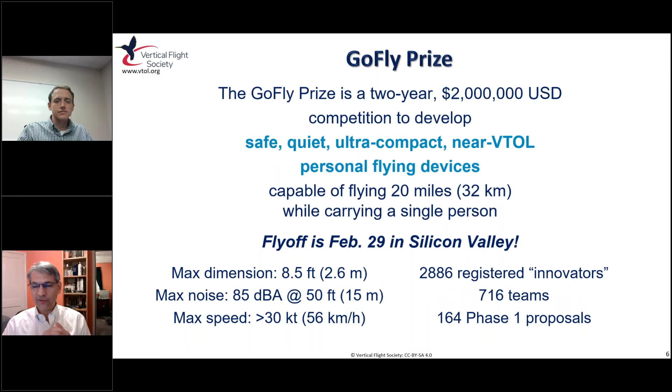They got a lot of interest. They awarded 10 awards in 2018 for $20,000 a piece.

On our website, we have, over the course of several years, 6 in-depth articles, plus a couple other articles on GoFly - you can look at our eVTOL.news site. At the fly-off itself, we have over 150 pictures of the different companies. Because of the pandemic, they weren't going to have another fly-off, and basically when somebody's ready to try and meet the challenge, then they'll go out there and do a test, or do the evaluation to see if they meet the requirements.

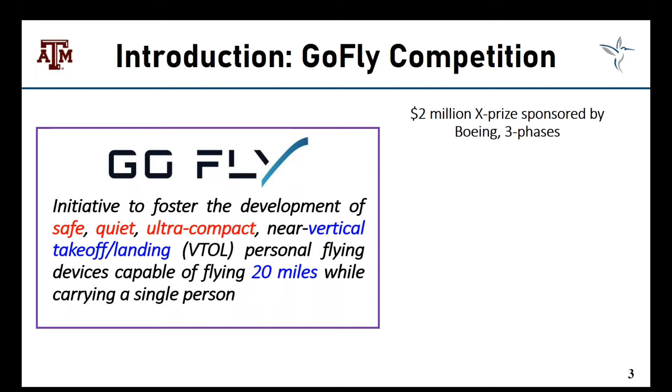The GoFly competition was an initiative to foster the development of safe, quiet, ultra-compact VTOL aircraft for carrying a single person for a range of about 20 miles, sponsored by Boeing with a $2 million X-prize. There were 3 phases. Phase 1 was a white paper design, due in April 2018; 10 winners were selected, each awarded $20,000. Phase 2 was the development and flight testing of a subscale prototype, which occurred in February 2019; 5 winners were selected, each awarded $50,000. The final phase is a fly-off demonstration of a full-scale aircraft, and it's ongoing—if any competitor meets the constraints, they'll win the $1 million prize.

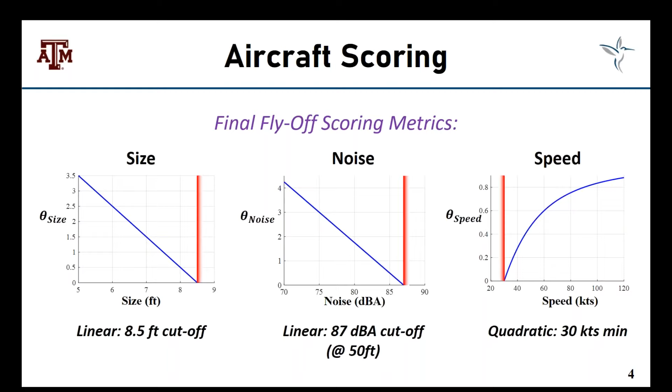So what are some of these competition constraints and scoring metrics? There were 3 basic ones: size, noise, and speed. Importantly, size and noise were weighed much more heavily than speed, so we focused a lot on those two in developing our aircraft. There were also other performance requirements, including completing 6 laps around two pylons located a half nautical mile apart, endurance requirements of 20 minutes total flight time with an additional 10 minutes reserve, and the competition emphasized an open air flight experience, requiring the operator to have an unobstructed 90-degree field of view at all times.

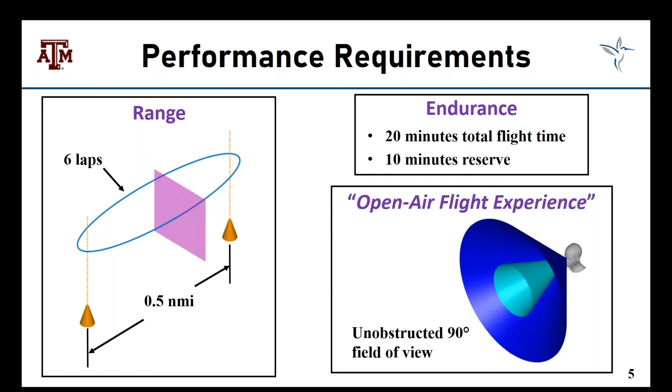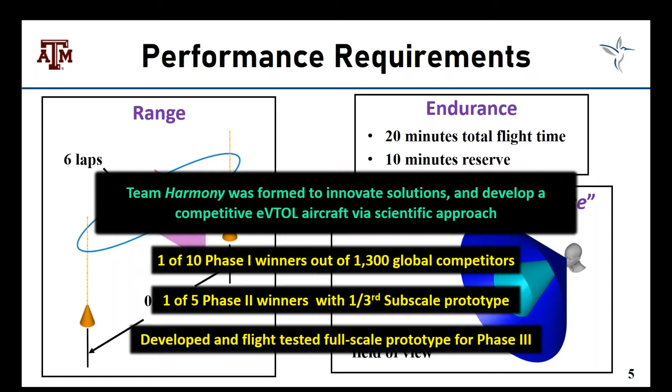Team Harmony was formed to create solutions and develop a competitive eVTOL aircraft using as rigorous and scientific an approach as possible. We were one of 10 phase 1 winners, and out of over 1,300 global competitors, one of 5 phase 2 winners for our subscale prototype. We went on to develop and flight test a full-scale prototype for phase 3. This talk will mostly discuss the design and development of these 2 aircraft.

So how did we determine our particular aircraft configuration? Well, we considered several options. We looked at more conventional configurations, such as a single main rotor or tandem rotor, intermeshing, or even a compound helicopter configuration. And these we just determined are not the most compact solution.

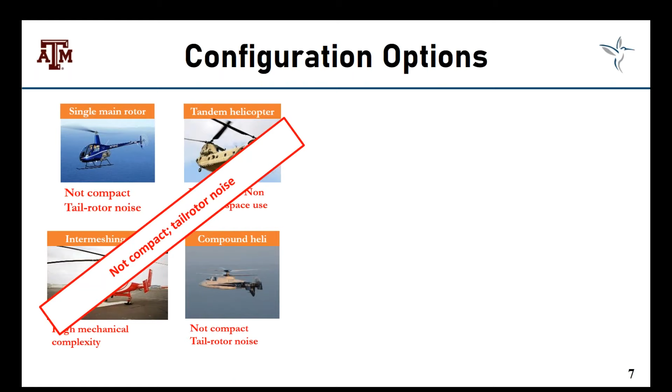A lot of them suffer from tail rotor noise as well. We also looked at ducted rotors and jetpacks.

Now, these are a lot more compact, but they suffer from excessive noise and extremely low efficiency. We also looked at reconfigurable aircraft like tilt rotors, tilt wings, and tail sitters. And for the purposes of our mission, this was just too mechanically complex and required a lot of inconvenient reorientation.

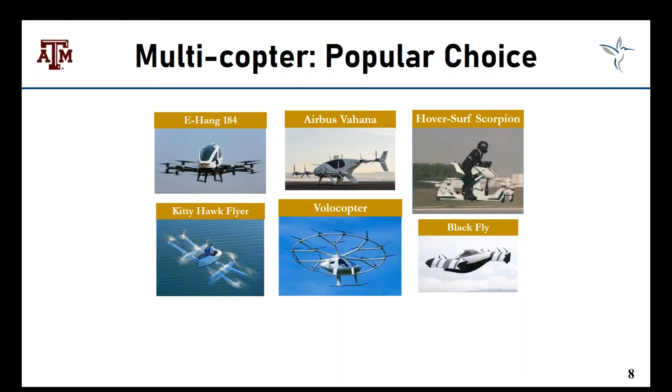Now, we also considered multicopters, which is a pretty popular choice amongst eVTOL developers today. Even multicopters are not the best choice for both maximizing aircraft efficiency as well as minimizing noise. In fact, in order to do this, there are 2 fundamental requirements: 1, you've got to minimize disk loading, and 2, you have to minimize blade tip speed.

And so after considering all of these, we determined that the optimal solution for this problem was a coaxial rotor system with an 8.5-foot diameter. This is very near the maximum size that was allowed in the competition.

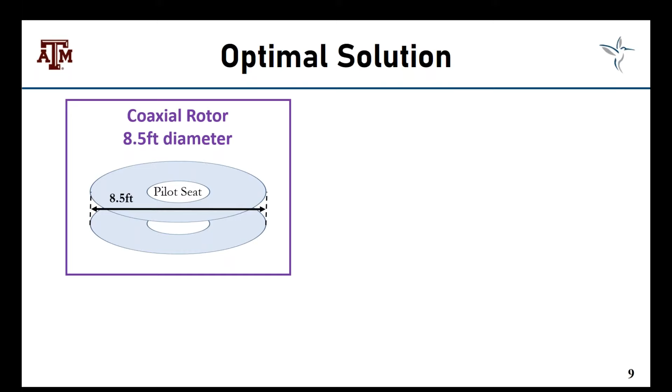So if we compare this to a quad rotor configuration, again with an 8.5-foot diameter, there's a myriad of advantages to the coaxial configuration, including over 4 times more disk area, which results in significantly lower power per unit thrust. The large rotors will operate at much higher and more efficient Reynolds numbers. And the design of the coaxial system is just a lot safer and more optimal use of space, since the pilot is at the center where the rotor speed is the lowest and you're really not generating much thrust anyway.

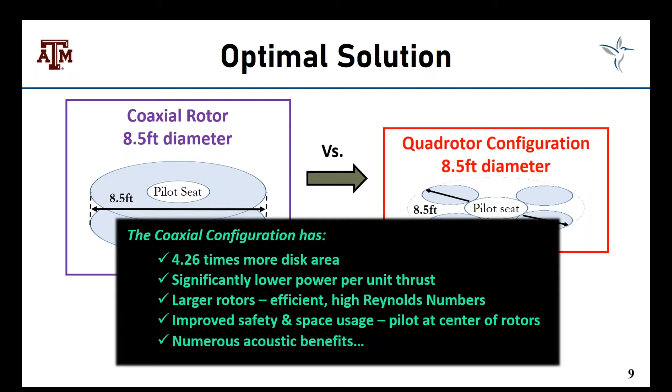And then there's also numerous acoustic benefits to the coaxial configuration. And in order to truly understand and appreciate these, we need to look at helicopter noise generation mechanisms. These come from a variety of different sources, including thickness noise, steady loading noise, high-speed impulsive noise.

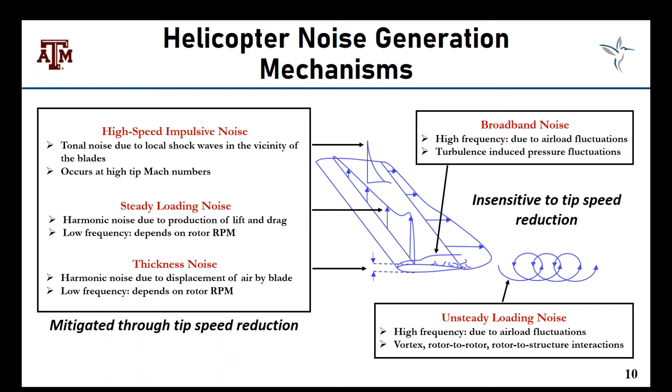The fortunate thing is that all of these can be mitigated pretty effectively through tip speed reduction. Now, you also have other noise sources such as broadband noise and unsteady loading noise. Unfortunately, these are relatively insensitive to any type of tip speed reduction efforts, and so these have to be addressed in different ways. I'll be discussing some of these throughout the talk.

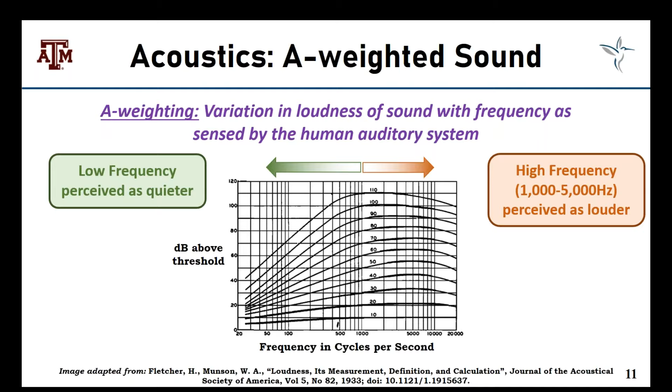You can see that for a reference tone, the lower frequencies are generally perceived as quieter, while those in the higher range, particularly in the 1 to 5 kilohertz range, are really perceived as much louder than they are. And so this is one reason why things like a quad rotor or maybe a chainsaw are particularly loud and irritating, because your ear is naturally amplifying the frequency in that particular range.

So from an acoustic standpoint, if we compare the coaxial configuration versus a quad rotor, there's a couple things to keep in mind. First, the magnitude is going to be a strong function of blade tip speed, and then the frequency of the sound, which is basically the blade passage frequency, is going to be a function of two things: your RPM and the number of blades.

So if we put these in a chart side by side, in the case of the coaxial system, we've got a large rotor operating at low tip speed, so we get a pretty low noise magnitude. But then in the case of the quad rotor, we have the opposite: small rotors, high tip speed, and the penalty is a high noise magnitude.

If you look also at the low RPM of the coaxial configuration, this is going to result in a much lower frequency, and as a result, an A-weighted advantage. The opposite, again, is true with the quad rotor: you're going to suffer from high frequency and an A-weighted disadvantage.

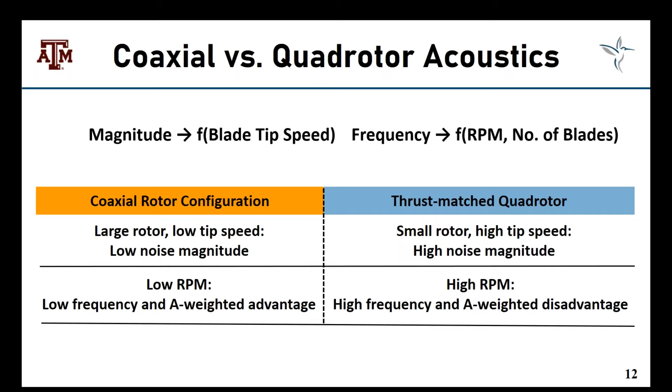Now, another consideration in a coaxial configuration is rotor spacing. And so we did some experiments where we measured the sound pressure levels for a variety of spacings between the coaxial system.

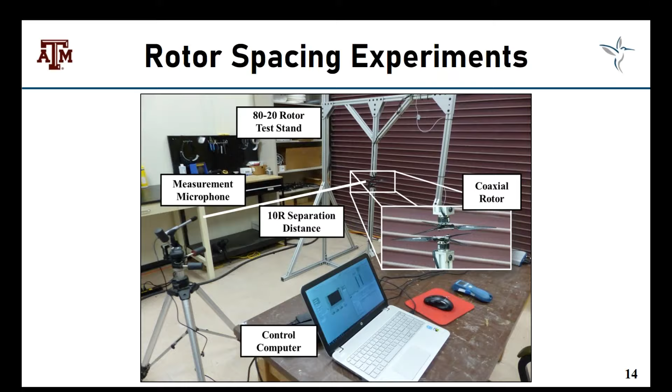So that was the distance we selected for our vehicle. Our final configuration consisted of a coaxial rotor system with a rotor diameter of 8.5 feet. That separation distance was 25% of the rotor radius, and we positioned the pilot above the rotor system to have a clear field of view, staying consistent with the spirit of the competition.

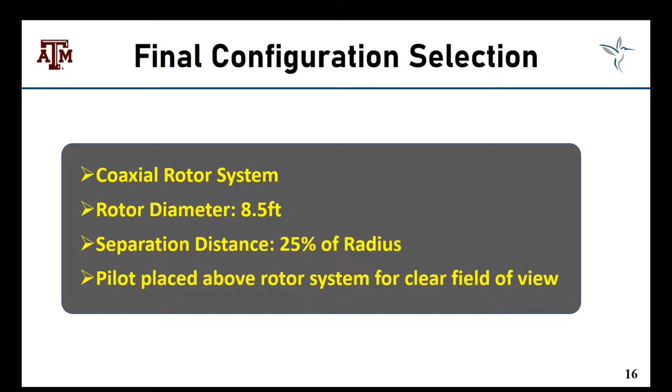As I mentioned, there have been some historical coaxial PAVs developed in the past. Some well-known examples are the Aerocycle and the Hiller platform. These were developed for military purposes, and they rely on kinesthetic control, where the pilot shifts their weight in order to control the CG location of the vehicle.

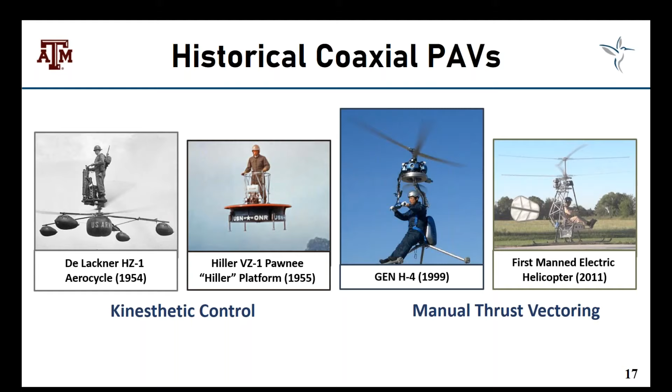More recently, we've got the Gen H4 and the first manned electric helicopter. These have the rotor system on a gimbal, and the pilot uses manual thrust vectoring to control the system. In all of these cases, we get a really heavy dependence on pilot skill, which prevents you from utilizing any type of stability augmentation system that would enhance the flight. As a result, none of these are really the best choice for a personal air vehicle flown by the average individual.

So we developed our own coaxial helicopter. Let's talk about the design and development of that system, starting first with the rotor system itself.

We had several key design tools, starting with an in-house blade element momentum theory code, which captured a lot of the complex aerodynamic interactions between the two rotors in the coaxial system. We also utilized Helios, a computational fluid dynamics code, which captured the flow field and air loads on the blades. Then we had an in-house acoustic solver that modeled all of the helicopter noise generation mechanisms.

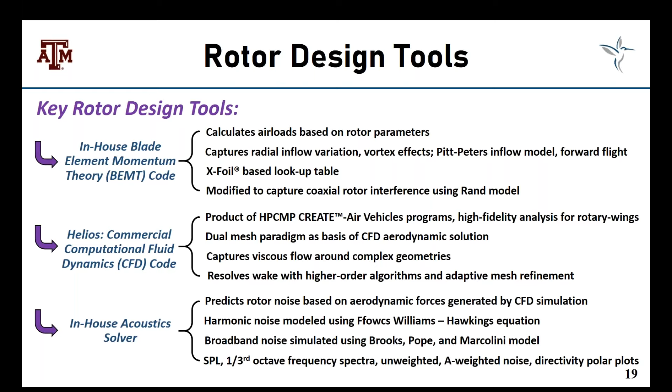We used these tools to do a pretty detailed parametric study with two basic objectives: minimize forward flight power, and minimize noise in hover. I'll go through the different parameters we varied, starting first with the rotor RPM.

In this plot of power versus forward speed, we can see pretty clearly that lower RPM decreases the required power. But looking at max angle of attack versus forward speed, lower RPM actually increases the required angle of attack, decreasing stall margin. After balancing these two, we determined the best RPM was 950, because this gave us reduced power requirement while allowing at least a 30% stall margin.

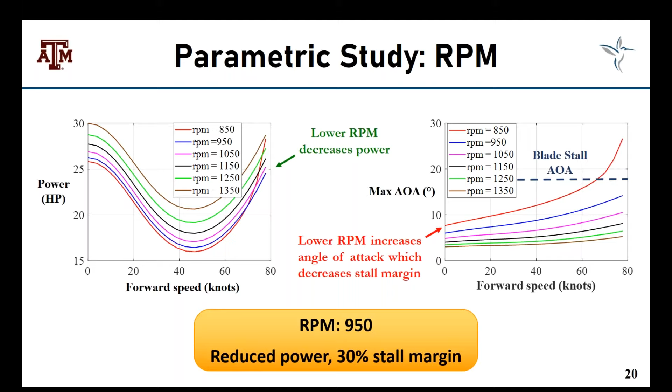We also did a similar investigation for solidity. Lower solidity results in lower power requirement, but again, lower solidity results in higher angle of attack and decreased stall margin. So we selected a solidity of 0.2 for this rotor design.

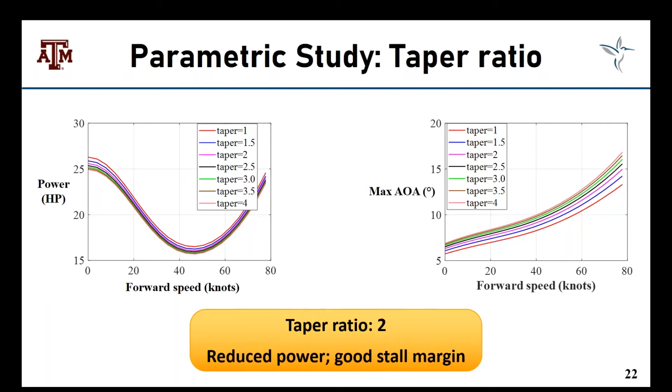Similarly, we did the same for taper ratio, and determined a taper ratio of 2 was best for this configuration. For twist, we determined the optimal twist was -9 degrees.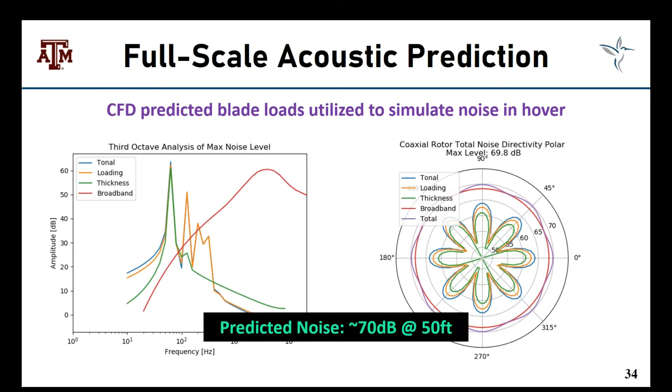There's a lot of interesting stuff going on here, a lot we could talk about, but the take home is that our predicted noise was about 70 dB at 50 feet. We'll see later on how this compares with the actual flying aircraft.

So we wanted to somehow verify these acoustic predictions. We took our subscale rotor sound pressure level measurements and scaled them up to the full scale size. You can see here in this plot of sound pressure level versus frequency our analysis, our predictions, and then our scaled experiments, and we got pretty similar results. So we were pretty confident that our full scale predictions would be accurate as well.

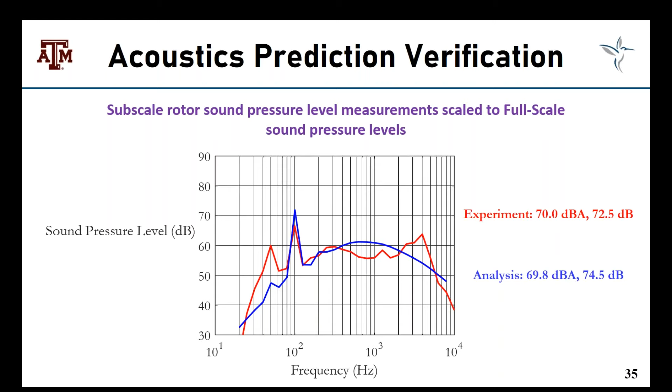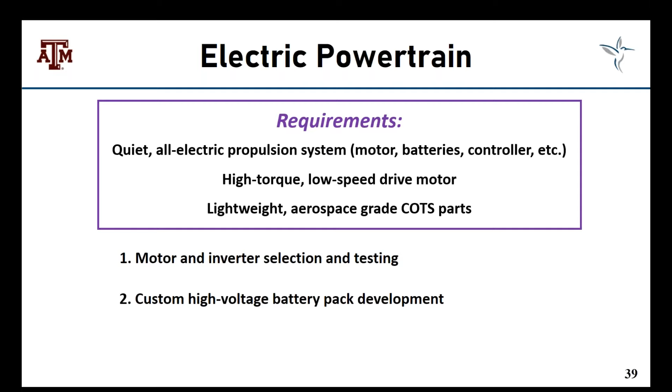All right, so let's talk about the electric powertrain now. We had a few key requirements: a quiet all-electric propulsion system, a high torque, low-speed drive motor, and we tried to use lightweight aerospace-grade COTS parts where possible. I'll discuss the selection and testing of the motor and inverter, the development of the high-voltage battery pack, and then the development of a quiet one-stage transmission.

When it came to selecting the motor, there were a few architecture options available. One was a radial flux stator, where the magnetic lines of flux are perpendicular to the axis of rotation. On the other hand, you get an axial flux stator, in which the magnetic lines of flux are parallel to the axis of rotation. We did a trade study of available radial and axial flux motors, and we determined that we get more torque per unit mass with the axial flux stator.

So we selected the EMRAX 208 axial flux permanent magnet motor, with a mass of about 20 pounds and max continuous power of 55 horsepower. We selected the high voltage model for efficiency, and this motor was an air-cooled model.

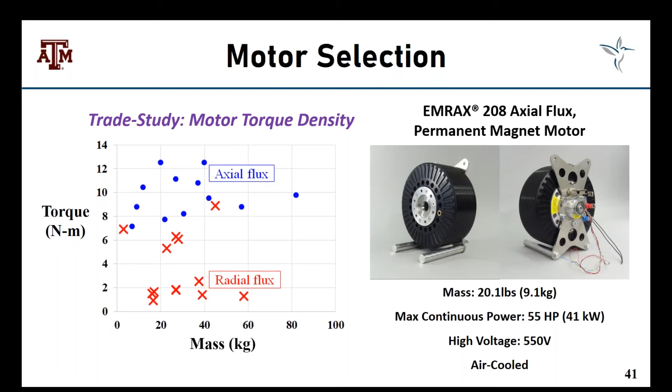Here you can see in this plot of our test data, torque versus RPM, with the efficiency curves provided by the manufacturer. This here is our case for axial climb, for hover, and also for forward flight. You can see that in all these cases, our motor efficiency was predicted to be over 94% for all these flight conditions. So that was the good part.

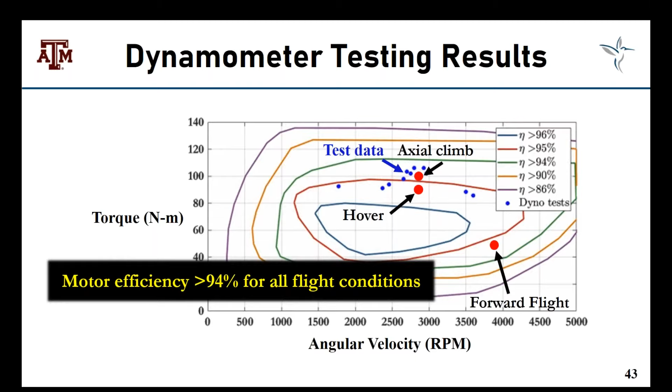The unfortunate thing, though, was that we experienced a lot of motor overheating during this testing, partly due to lack of sufficient cooling and lack of airflow over the motor. So what we did was we graduated to the next size EMRAX motor, the 228. It was slightly heavier at 27 pounds, with a max continuous power of 83 horsepower. Again we selected the high voltage version, and the key was that this was both an air and water cooled unit. These were the motors we finally installed on the aircraft, one per rotor, and we also developed custom cooling systems for each of the motors and inverters that kept it cool with a water cooled system.

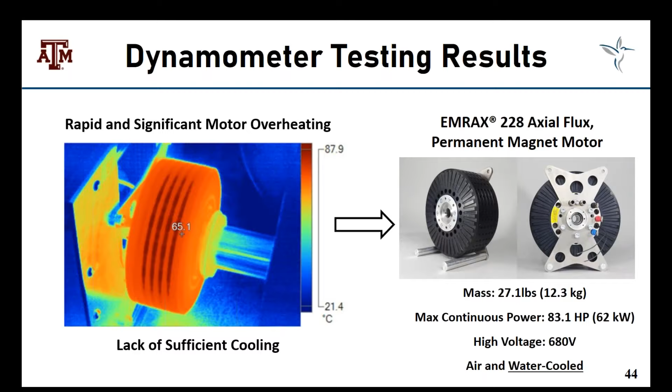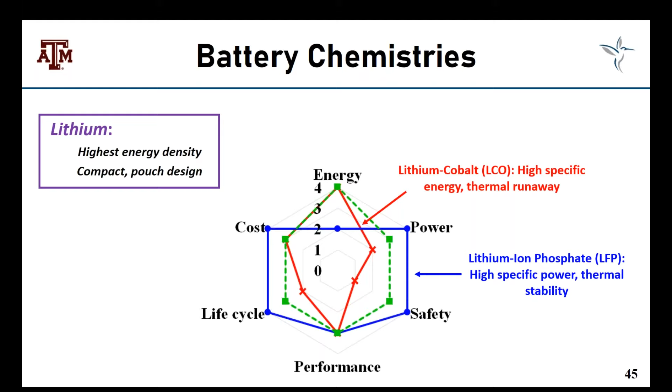As far as the battery chemistries, we considered a variety. We selected lithium because this gave us the highest energy density and comes in a compact pouch-based design. In this spider graph of various performance metrics of batteries, we have a few different varieties shown here. In red is the lithium cobalt, which has a high specific energy but tends to overheat. There's also lithium ion phosphate, which has a high specific power and more thermal stability. And then there are other more exotic ones like lithium manganese nickel cobalt, which is becoming used more in eVTOL applications.

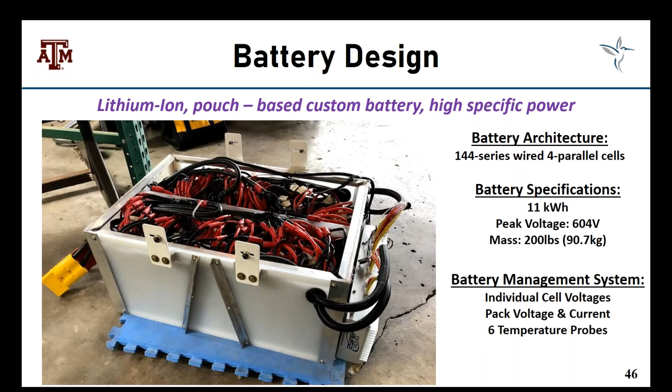We finally selected a lithium ion pouch-based custom battery, which provided us with a high specific power. Here you can see in this photograph of the assembled battery pack: it was 144 series wired, 4 parallel cells, providing 11 kilowatt hours of battery. The peak voltage was 604 volts and it had a mass of 200 pounds. There's a battery management system strapped to the back of this, which monitored all the individual cell voltages, the pack voltage and current, as well as 6 temperature probes dispersed throughout the pack. Our pack level energy density was about 133 watt hours per kilogram.

As I mentioned, we had a one-stage reduction drive to meet the low RPM, high torque demands of our rotor, and we considered a few different drive styles, for example, belt and pulley. These have been demonstrated in a V-belt transmission in the YO-3A Quiet Star, a virtually silent aircraft developed during the Vietnam era.

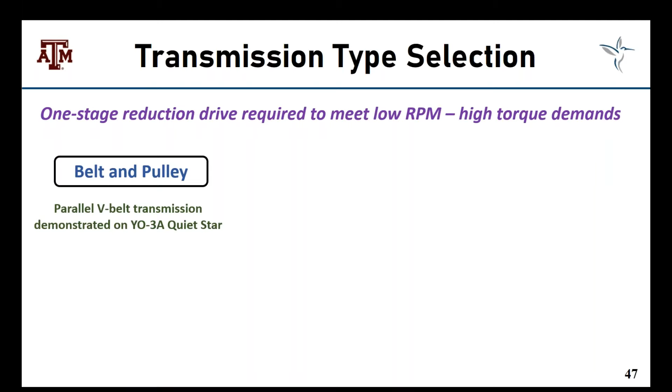This, however, is not a particularly compact solution. Belts can suffer from runout noise. It requires a lot of heavy support structure. And meshing noise can also be an issue with timing belts.

So we also looked at chains and sprockets. This is a little more compact. You can mitigate the noise with a tensioner, but it tends to be maintenance intensive, mechanically complex, and also requires a heavy support structure.

So we looked then at the gearbox option. This is a more simple, elegant, compact, and reliable solution. It can, however, be relatively noisy. There are some steps you can take to mitigate this noise: using helical teeth with a high contact ratio tooth profile, enclosing the gearbox in a properly designed transmission housing, and providing sufficient lubrication. This was ultimately the option we went with.

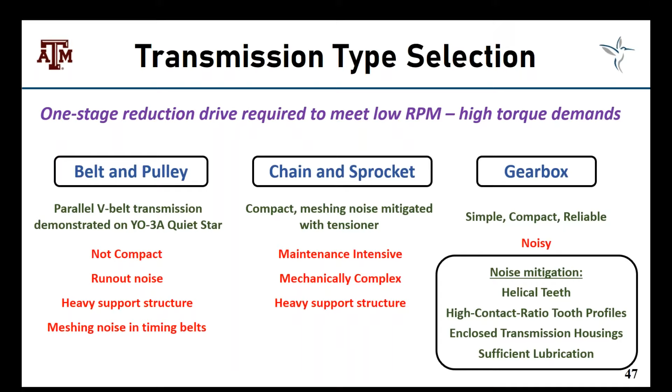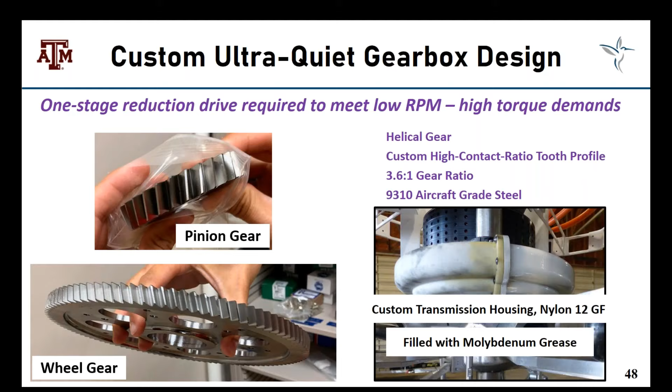Here's some photographs showing the pinion and wheel gear. These are a helical gear pair utilizing a custom high contact ratio tooth profile, providing a 3.6 to 1 gear ratio, and manufactured of 9310 aircraft grade steel. Here you can see a photograph with the transmission housing around it, made of nylon 12 GF and filled with molybdenum grease. We're pretty happy to report that this custom designed transmission was quieter than even the rotor during operation, so we were pretty happy about that.

All right, so let's talk about the flight dynamics and control of the system. In our system, we have dual rigid rotors. They are controlled with mechanically independent, electronically coupled swash plates, which gives us excellent control authority, maneuverability, and gust tolerance.

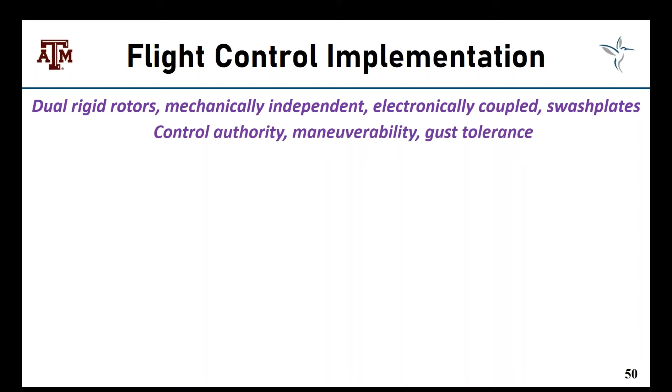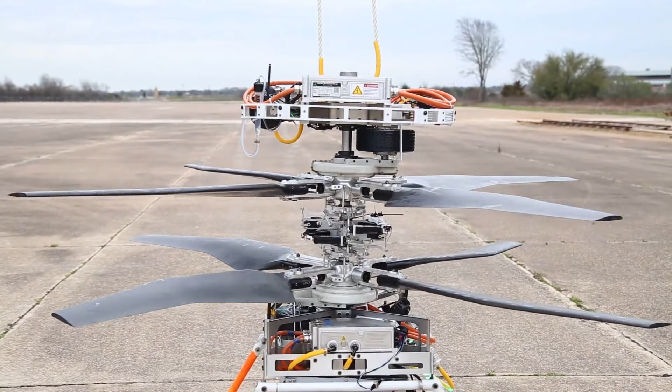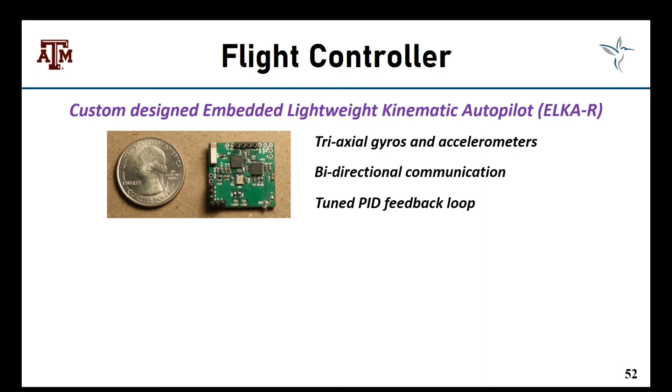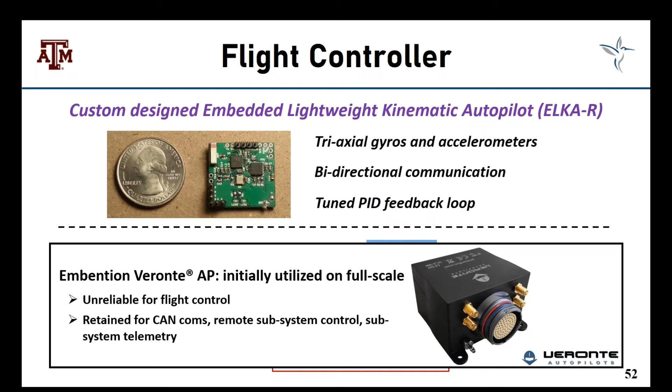I will say that initially we did use the Embention Veronte autopilot on the full scale, but it proved unreliable for flight control, though we did retain it for CAN communication and other subsystem control.

We modeled the flight dynamics of the system to predict the flight characteristics and evaluate its stability, so we derived the fully nonlinear equations of motion. We got the inertias and mass from our CAD model. For the forces and moments, we used our BEMT model with a Peters inflow, and all of this was analyzed using Texas A&M University rotorcraft analysis code.

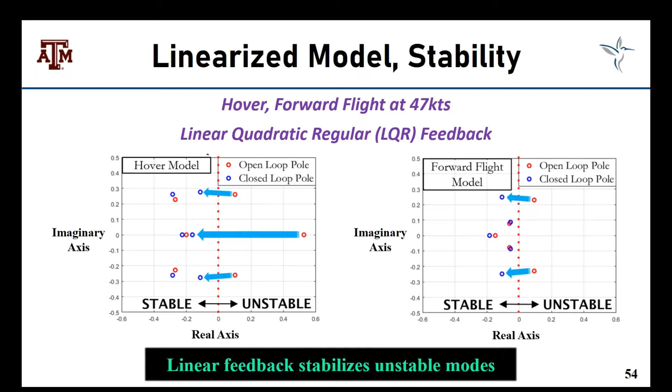We took our nonlinear system and linearized it about hover and forward flight at 47 knots and stabilized it using a linear quadratic regulator. Here you can see the open loop and closed loop poles for the hovering case, and you can see that it stabilizes all the unstable modes, similarly for the forward flight model. This demonstrated that our linear feedback was in fact able to stabilize the unstable modes.

We also did some flight simulations. The first thing was we perturbed it with a 15-knot upwind gust, and you can see that the disturbance was regulated within about 15 seconds or so. We also simulated the entire competition course, which involved vertical flight, forward flight, maneuvering flight, and all that stuff. All of this demonstrated, or at least predicted, that our aircraft could handle gusts well and also perform well in tracking.

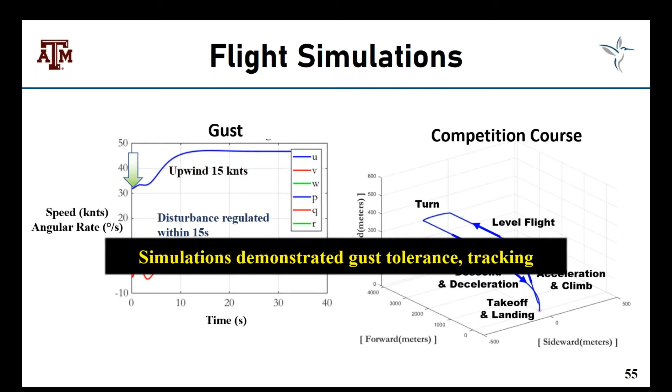Now we also did an X-plane simulation of the aircraft. Let me see if I can play this.

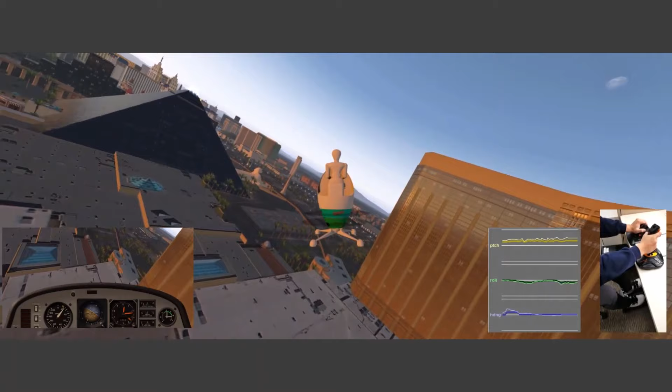All right, so this is a real-time simulation of our aircraft in X-Plane. This was flown by an experienced helicopter pilot, and he reported that the aircraft behaved well. There were no unexpected dynamics or anything like that, so we were pretty happy with this result.

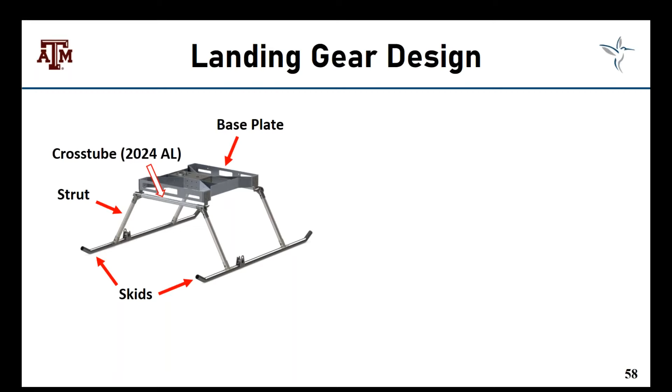Okay, so let's talk about the structural design and analysis of some of the parts in the aircraft, starting with the landing gear. Here you can see it has skids and vertical struts that convey the forces from the skids to the base plate. One critical component is the cross tube, which acts as a leaf spring or shock absorber to absorb the landing impacts.

For the 1G case, here you can see the von Mises stress. Here's the case for the 4G loading case. Even under the 4G loading, you can see that the von Mises stress was below the maximum yield stress, so we were pretty happy with that.

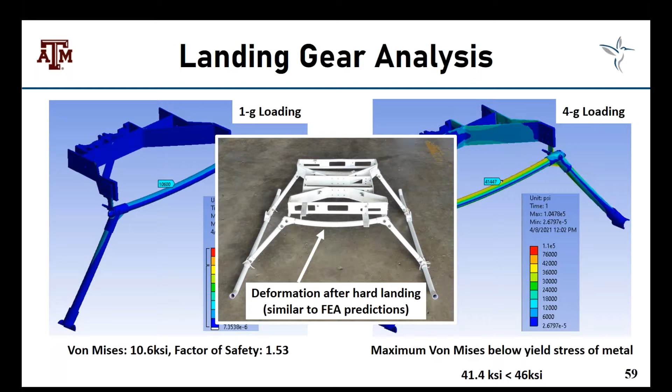Interestingly, we did have a pretty hard landing, and here you can see some plastic deformation of that cross tube, which demonstrated its action of absorbing those landing impacts.

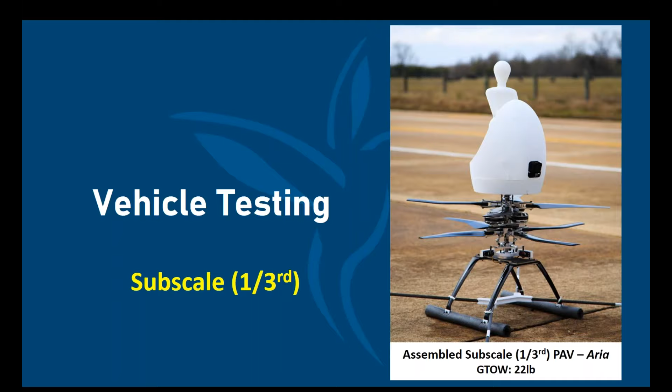All right, so let's talk about vehicle testing. We'll talk first about the 1/3 scale aircraft. Here you can see in this photograph on the right the assembled aircraft, which had a gross takeoff weight of 22 pounds. The first step of the testing was gimbal stand testing.

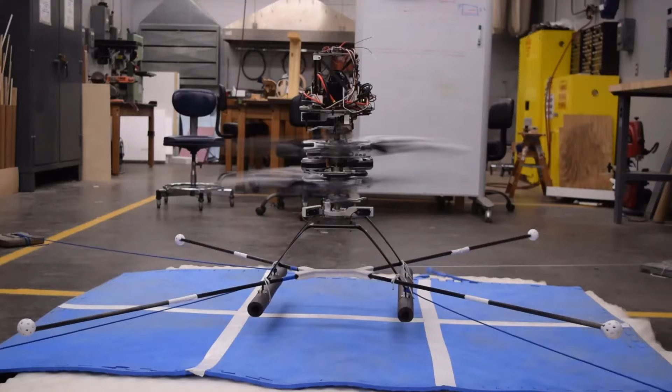Okay, so the next phase of testing was indoor tether testing for the subscale. This was to tune the flight controller and trim the rotors and stuff, and it performed well and demonstrated stable flight. So that was a good result from that.

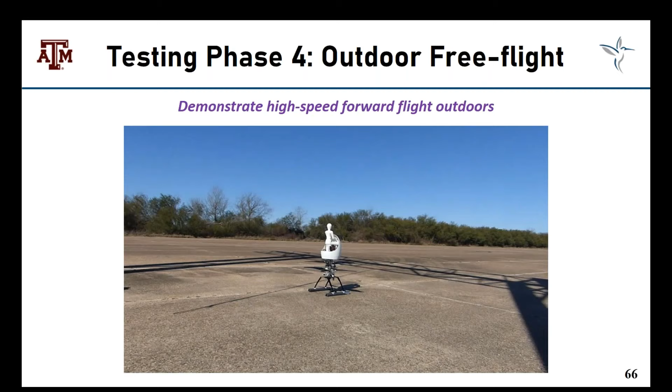So the fourth phase of testing was outdoor free flight testing. This was to basically demonstrate forward flight capability, maneuverability and controllability in high-speed forward flight.

We were pretty happy with the performance of the aircraft. That rigid rotor system really turned out to have a lot of control authority, and of course in the hands of an experienced RC pilot that helped a lot.

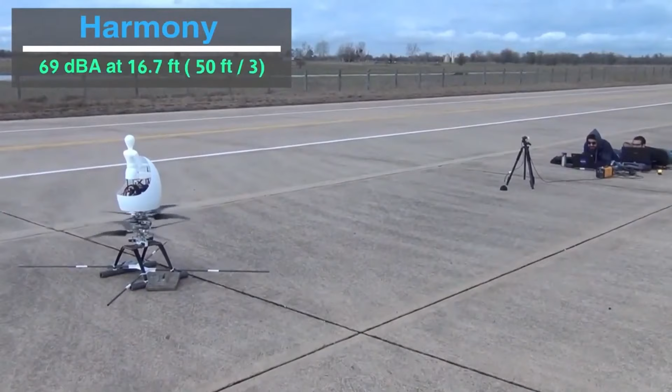Okay, and then we also did some sound pressure level measurements of our system in comparison with a thrust-matched quad rotor. Let me show that here in this video, where we'll just listen in and hear the difference between the quad rotor in comparison to our system. And so here you can clearly tell that there's a marked difference between the two.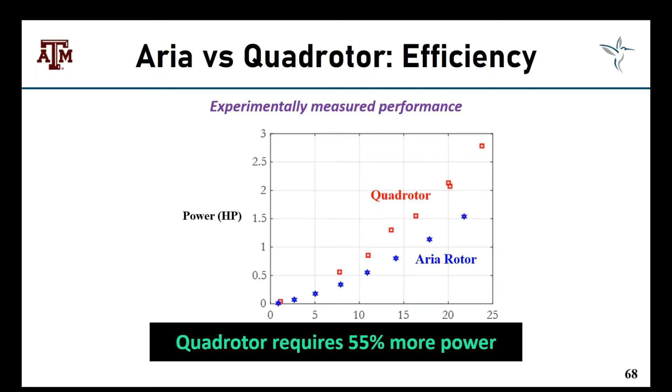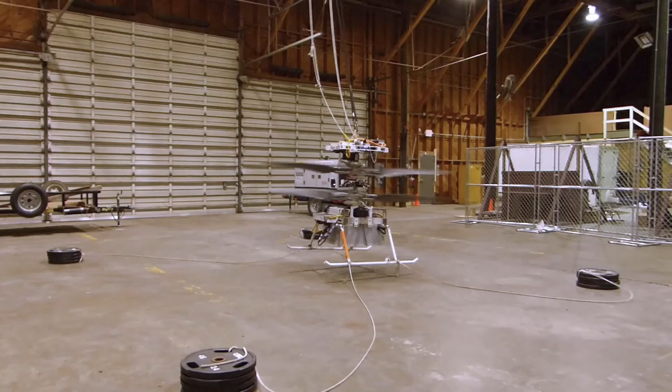And so here we are doing some indoor tether testing with the full-scale aircraft. The pilot is providing some different inputs, and it responded favorably. I'll note here the tethers are just for safety. They're not actually affecting the dynamics of the vehicle at all.

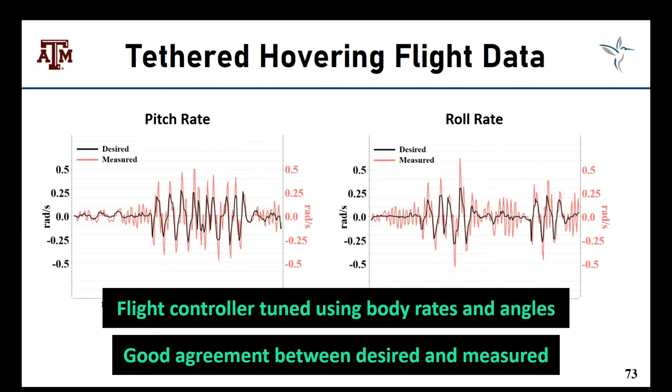From that, we collected some of the flight test data. This is the pitch and roll desired and measured rates. The reason why these are important is because our flight controller was tuned by using these rates and angles. We got pretty good agreement between the two of them, demonstrating that our flight controller is pretty well tuned. There is a little bit more noise in the measured result, which is kind of expected for the rotary system.

Now, during indoor tether testing, we also did a payload test. We've loaded it up with 165 pounds of payload, and the aircraft lifted it very well. There were no issues, no unexpected dynamics, nothing really changed with the system.

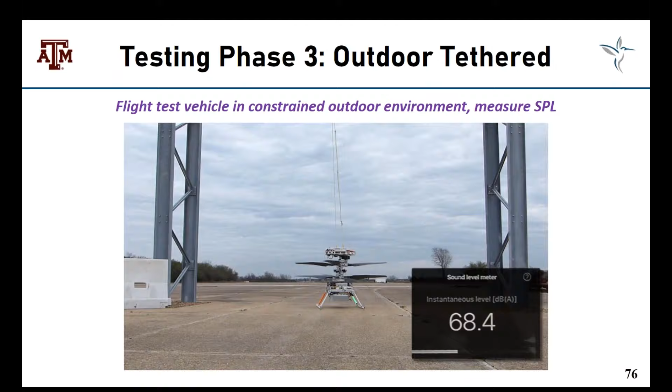All right, and so the next phase of the testing was outdoor tether testing, and this basically allowed us to have an intermediate stage between indoor tethered and free flight outdoor. Another thing we did also was we measured the sound pressure level at 50 feet during this test. So let's play this here.

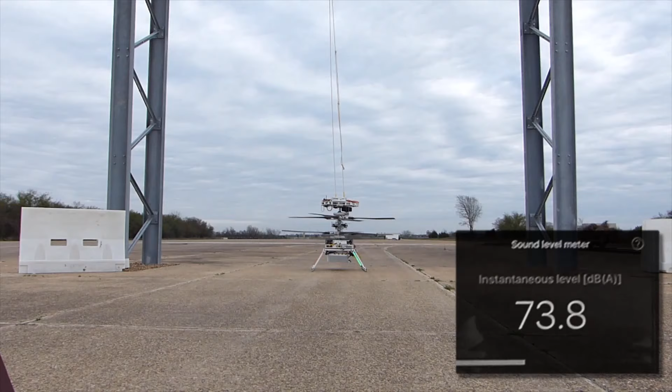So here we can see hovering at 50 feet, we're getting about 73 dBA or so, which is pretty remarkable for this size aircraft. In fact, as far as we know, this is the quietest aircraft in this weight category, the quietest rotorcraft in this weight category that we know of.

All right, and then the final phase of testing was outdoor free flight testing. And this, of course, was to demonstrate the forward flight capabilities of the system.

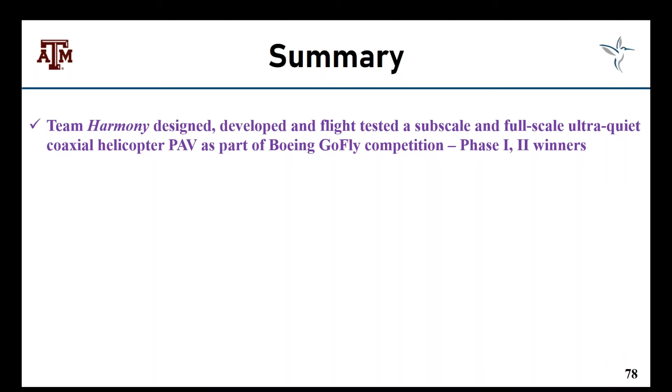Okay, so with that, we'll summarize briefly. Team Harmony, we designed, developed, and flight tested both a subscale and a full-scale ultra-quiet coaxial helicopter personal air vehicle as part of this competition. We were, of course, phase 1 and phase 2 winners, and some of the key innovations in this project included...

Developing ultra-quiet and efficient rotor systems, using rigid rotors with independent collective and cyclic control, implementing electronically coupled dual swashplates for mechanical simplicity. And then, of course, we developed a custom electric powertrain and custom transmission, ultra quiet transmission, and then developed an 11 kilowatt hour custom battery pack. The key thing here is that our team designed, built, and flight tested a full scale aircraft in a mere 10 months. So this speaks to the dedication and commitment of our team.

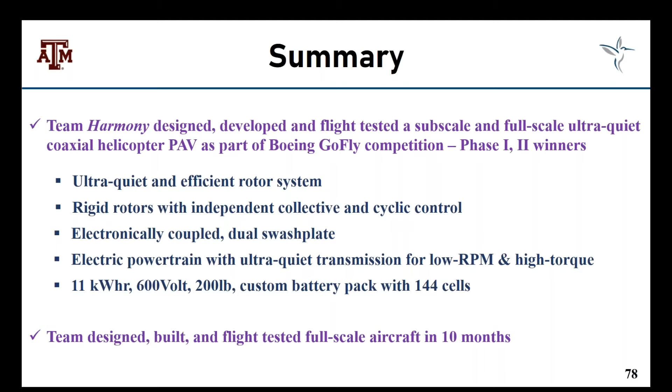So some of the key takeaways, some of the lessons learned. We demonstrated first that it is possible to significantly quiet rotors without losing efficiency. Specifically, we measured 73 dBA at 50 feet, which is pretty remarkable. We were able to achieve this through tip speed reduction, planform shaping, and acoustically tailoring the blade design.

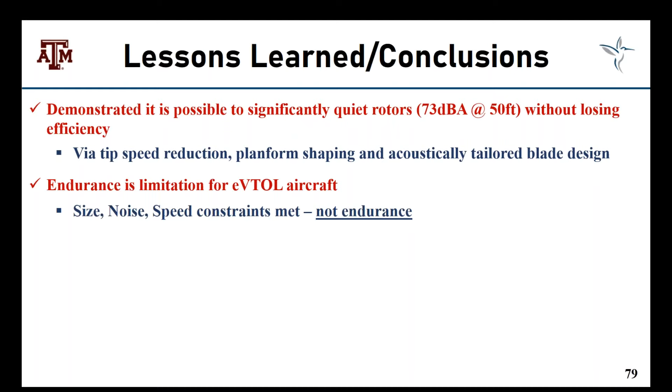Another thing we saw is that endurance really is still a serious limitation for eVTOL aircraft. We were able to meet the size and the noise constraints, most likely the speed constraint as well, but definitely not endurance. In fact, our longest hovering flight, as I mentioned, was only 8 minutes. That was from full charge to almost completely depleted, and that was with no payload. This really just speaks to the low energy density of current battery technology. We were only about 133 watt hours per kilogram at the pack level.

Also, there is a need for reliable, lightweight aerospace grade COTS parts specifically for eVTOL applications. We had numerous mechanical and electrical issues. Some of these were expected just as a process of developing the aircraft, but some of the COTS parts were pretty heavy. For example, the motor controller, some of them were unreliable, the first autopilot that we tried.

So these are some of the key results from this study. So the question is, what's next? Well, we are still pursuing the GoFly prize. There's no winners yet. It's still an ongoing competition.

So if we can at any moment demonstrate that we have an aircraft, then that prize is up for grabs. Now we did start a company, a small business, Harmony Aeronautics, as a result of some of the IP that we have developed. This is specifically focused on ultra quiet rotor technology, in general application for eVTOL aircraft.

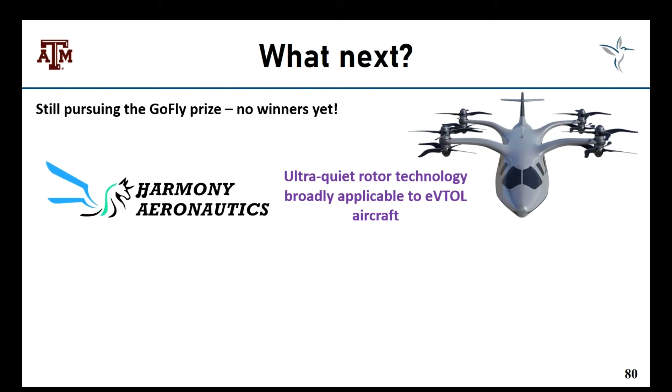Harmony Aeronautics won a phase 1 Air Force Agility Prime STTR grant, through the AFWERX program. This was a 6-month, 150K feasibility study on developing these ultra quiet rotors for eVTOL and UAMs.

We were fortunate, we got an MOU signed and we submitted a phase 2 proposal. We are currently awaiting those results, and they should be coming out here in a few minutes. We're biting our nails, just waiting for that result. But if we do get that, then we'll be full steam ahead on this endeavor.

So I know that was long. I thank you so much for your attention. And if you have any questions, be more than happy to answer them.